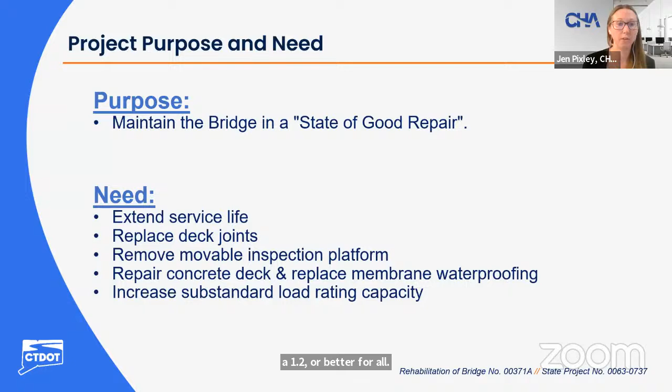The bridge was built in 1958 and had a full superstructure replacement in 1995. It carries 3 lanes eastbound and 4 lanes westbound. Spans 1 through 5 have an out-to-out dimension of approximately 92 feet, widening to approximately 112 feet at spans 6 through 11, as an 18-foot wide sidewalk frames into the main structure on the south side at Pier 4.

Here is a colored plan and elevation view of Founders Bridge. This view shows the west side on the Hartford side; the next will show the East Hartford side. The bridge is an 11-span structure comprised of a concrete deck supported by welded steel plate girders. Spans 1 and 2 are 2-span continuous, spans 3 through 5 are 3-span continuous, and spans 6 through 11 are 6-span continuous. The superstructure is supported by concrete abutments and piers.

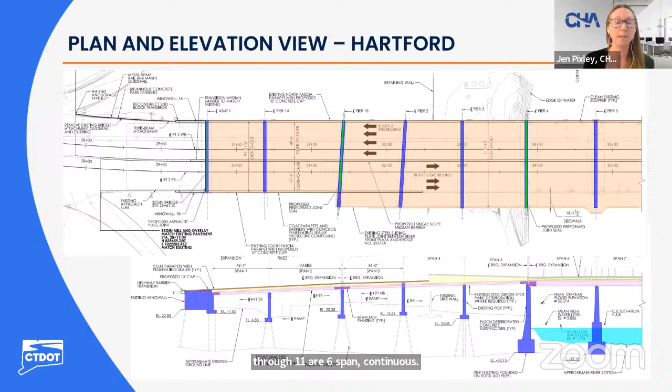As noted, this is the east side of the bridge on the East Hartford side.

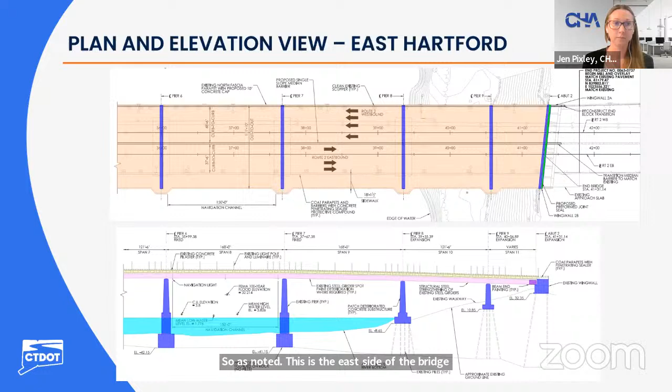This view shows the cross-section of the bridge. The top cross-section represents spans 1 through 5, and the bottom represents spans 6 through 11. Route 2 is a divided highway consisting of 4 11-foot travel lanes on the westbound side and 3 11-foot travel lanes on the eastbound side, with a 3.5-foot right shoulder and 1-foot left shoulders. Concrete parapets exist at both fascias and the medians. The median barrier separates Route 2 eastbound and westbound, and a sidewalk barrier separates the sidewalk and Route 2 eastbound.

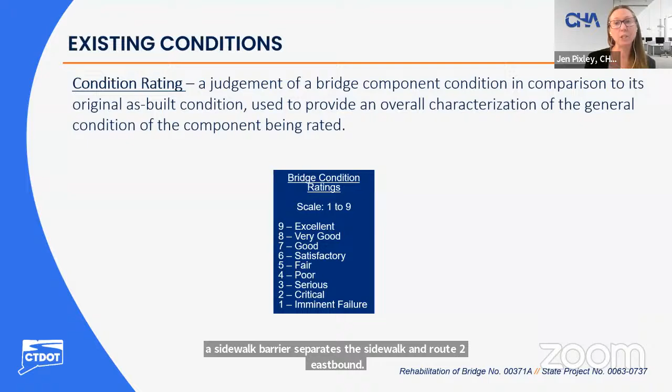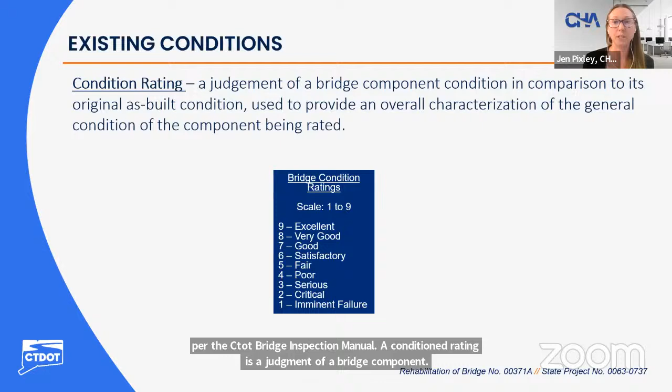Before getting into existing conditions, it's useful to note how condition ratings are determined and their purpose. Per the CTDOT Bridge Inspection Manual, a condition rating is a judgment of a bridge component's condition compared to its original as-built condition, used to characterize the general condition of the component being rated. Condition ratings are assigned a numerical value: 8 being very good, 7 good, 6 satisfactory, 5 fair, and 4 poor.

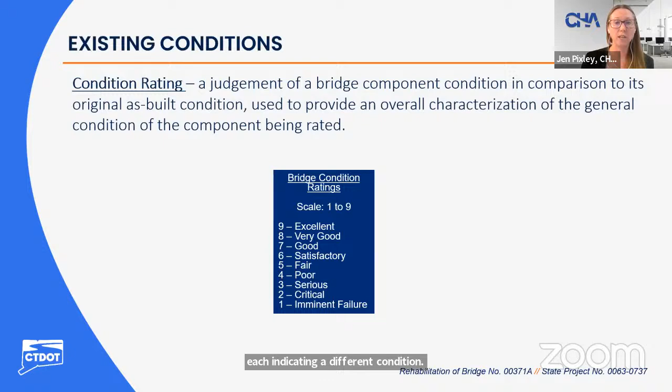Now discussing existing conditions of Founders Bridge. First, the deck: overall it is in satisfactory condition. The underside exhibits shallow rebar, map cracking, and hairline cracks with efflorescence and rust staining, some with dampness and seepage. There is isolated honeycombing with exposed rebar up to 1/2 inch deep, numerous hollow areas, numerous spalls up to 2.5 inches deep, and isolated spalls up to 4 inches deep, several with exposed rebar. The true condition of the deck is unknown due to the bituminous concrete wearing surface on top.

Existing deck joints are in fair condition. There are asphaltic plug joints at Abutment 1 and Pier 1B, installed in 2012. There are modular deck joints with concrete headers at Pier 4 and Abutment 2, original to the deck and installed in 1995. The asphaltic plug joints were recently repaired.

Modular deck joints exhibit separations up to 15 feet long between glands and steel extrusions, with light visible below, moderate sand impaction in the joint glands, as well as ponding water. Concrete headers exhibit random spalling up to 1 inch deep, as well as other spalls up to 2 inches deep. The pourable seal joint at Abutment 2 is missing up to 50% of the joint length. The sidewalk sliding plate deck joints with concrete headers, located at Pier 4 and Abutment 2, exhibit isolated spalls up to 3/4 inch deep in the concrete header.

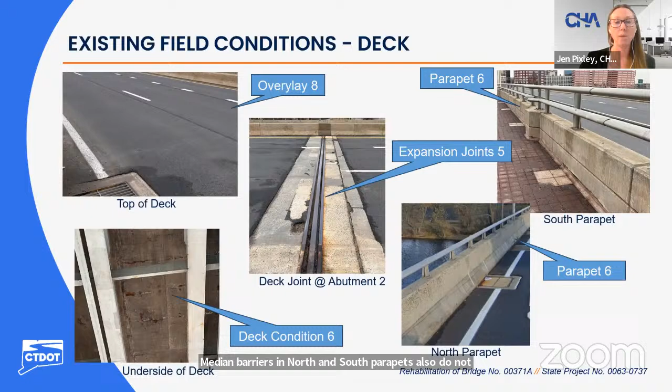The concrete parapets are in satisfactory condition and the medians are in good condition. The north fascia parapet and sidewalk barrier meet TL4 loading but are not MASH compliant. The median barrier is also not MASH compliant and only meets TL2 loading. Median barriers and north and south fascia parapets also do not meet CTDOT's minimum height requirement of 42 inches above the roadway surface.

Regarding existing conditions at the approaches, overall they are in satisfactory condition. The approach slabs are not visible as the approach pavement is in very good condition, having been recently paved. The approach guide rail at the northwest approach is in satisfactory condition with some collision damage, and appears to meet R-B standards. However, the guide rail and bridge attachments do not meet current CTDOT standards and are not MASH compliant.

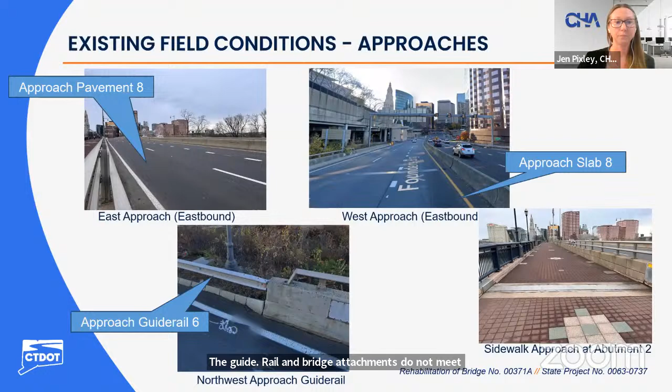Existing conditions for the superstructure. Overall, the superstructure is in satisfactory condition. The bearings are noted to be in fair condition.

The bearings consist of elastomeric expansion bearings, steel fixed bearings, and pot bearings. The elastomeric bearings exhibit isolated minor curling and bulging, random gaps up to 1/4 inch between the pad and pedestal.

With up to 27% loss of bearing contact area, and laminated rust at sole plates. The fixed bearings exhibit random moderate to heavy rust, anchor bolts slightly tipped and nuts loose or backed off, gaps up to 1/4 inch between masonry plates and pedestals, which result in up to 71% loss of bearing contact area at one location, and all other locations with up to 20% loss of bearing contact area.

The pot bearings exhibit isolated sole plates in contact with keeper blocks, light to heavy rust, and up to 1/16 inch deep section loss due to leaking joints, isolated PTFE strips sliding out, and isolated Teflon shavings observed.

The girders are noted to be in satisfactory condition. The girders exhibit random peeling paint and up to heavy rust, isolated laminated rust, and isolated minor losses, which result in less than 5% flange loss and less than 10% bearing and shear loss.

Structural steel paint is noted to be in good condition, with less than 5% of the exposed steel surface area showing evidence of rusting and missing paint coating.

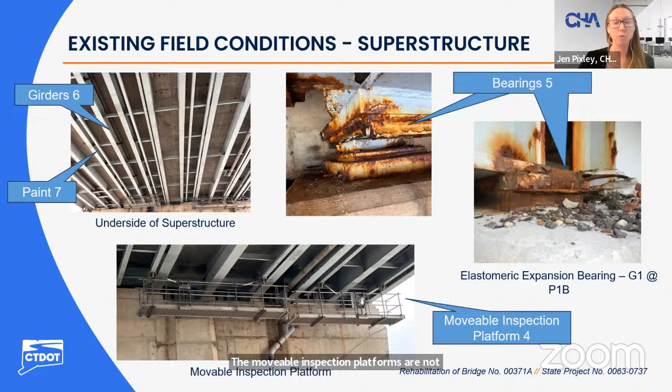The movable inspection platforms are not functioning and are in poor condition. These will be removed as part of this project.

For the substructure, overall, the substructure is in satisfactory condition. The concrete abutments exhibit vertical, horizontal, and map hairline cracks with efflorescence and rust, hollow areas and spalls up to 2 inch deep with and without exposed rebar.

Piers 1A, 1B, and 2 are concrete piers with pier caps and columns, and piers 3 through 9 are solid concrete wall piers with post tensioning.

The pier caps and columns exhibit linear and map hairline cracks with isolated efflorescence and spalls up to 1/2 inch deep. Wall piers also exhibit linear and map hairline cracks with random rust and efflorescence, as well as isolated hollow areas, isolated spalls with exposed rebar up to 4 inch deep.

Piers 4 through 8 stems extend below the water line and exhibit spalls with exposed rebar and some with section loss, abrasion throughout, hairline cracks, and some cracks open up to 1/8 inch wide.

For erosion and scour, is noted to be in satisfactory condition. There are 2 areas of erosion, one at abutment 2 and one at pier 2, which are both located below scupper pipes.

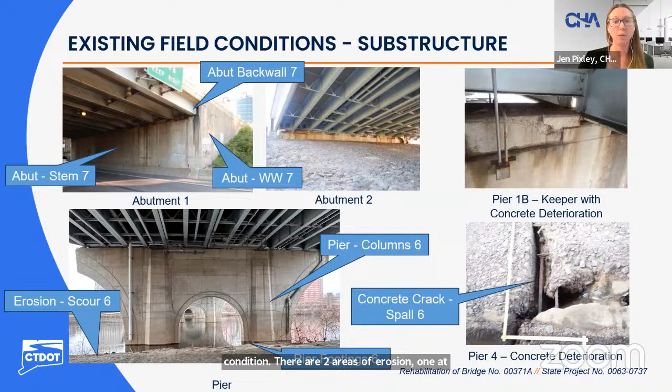Existing condition of the channel and protection. Overall, channel and channel protection is in satisfactory condition. Channel scour is in satisfactory condition as well.

The channel bottom elevation have areas of aggradation up to 4.7 inches high and areas of degradation up to 7.7 feet deep.

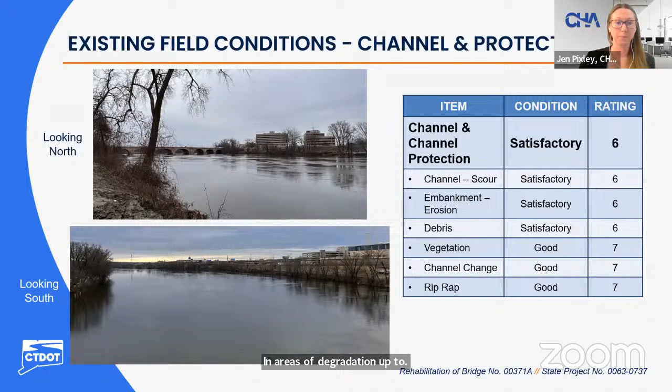Major scope of work items include steel strengthening, painting beam ends, replacing elastomeric and fixed bearings, as well as pot bearings at pier 4 and abutment 2, replace deck joints, replace wearing surface and membrane waterproofing, repair concrete deck, approach slabs and barriers.

Add a 10-inch concrete cap to the north fascia parapet and portion of the south fascia parapet, replace median barrier, repair concrete substructure, replace the northwest approach guide rail and curbing, upgrade end block transitions to be MASH compliant, restore erosion at abutment 2 and pier 2, install new roadway lighting poles, navigation light, and night underbridge lighting.

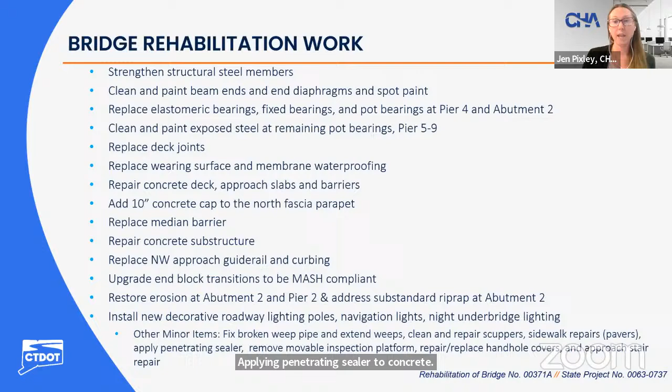Other minor items include repair broken weep pipe, extending weeps, cleaning and repairing scuppers, sidewalk paver repairs, applying penetrating sealer to concrete, removing the movable inspection platform, repairing handhole covers, and repairing approach stairs.

Next, I will discuss some additional information on the existing conditions and proposed repairs on a few scope items.

Steel strengthening will be performed to bring the structure up to current code standards. Strengthening includes adding diaphragms, installing bottom flange cover plates, and installing transverse stiffeners.

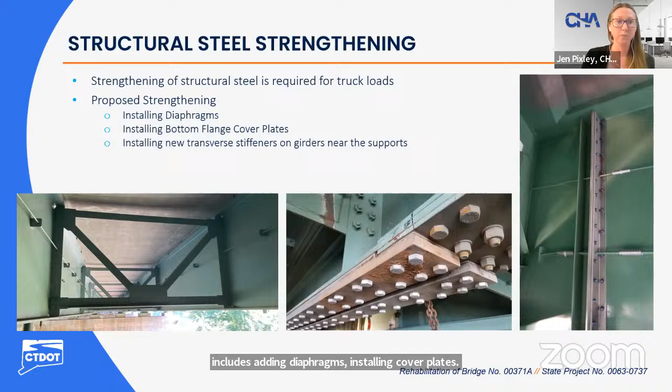For bridge joints, as noted previously, are in fair condition. There are asphaltic plug joints at abutment 1 and pier 1B. There are modular deck joints that are original to the deck and were installed in 1995 at pier 4 and abutment 2. All deck joints will be replaced.

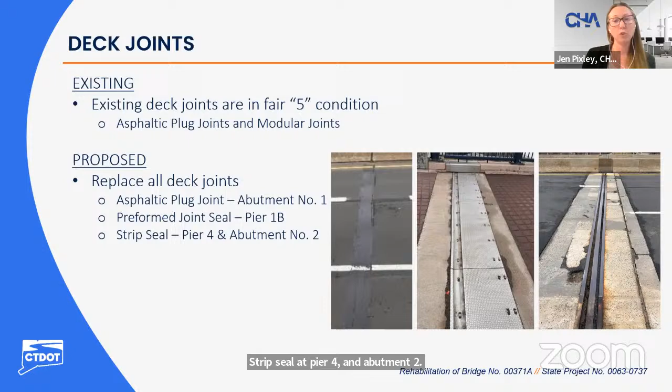Asphaltic plug joints at abutment 1, preformed joint seal at pier 1B, strip seal at pier 4 and abutment 2. It should be noted that preformed joint seal and strip seals require deck end reconstruction to install the new joints.

Quickly touching upon highway geometrics for this project, the bridge has an ADT of approximately 27,000, and the bridge will not improve any highway geometrics.

For anticipated project impacts, MPT on the bridge will utilize staged construction for repairing the concrete deck, installing the waterproofing membrane and pavement, replacing deck joints, replacing the median, and capping concrete parapets. This work will be accomplished using temporary lane closures and lane shifts.

It is anticipated a portion of the deck repairs and deck joint reconstruction may be accomplished using temporary off-peak lane and shoulder closures. For sidewalk repairs, the work area and pedestrian path will be separated by water-filled barrier, and the contractor will be required to maintain a minimum 5-foot pedestrian path throughout the entire construction duration.

Stage construction will be utilized. Stage 1 will close the left lane of Route 2 eastbound and westbound, while Stage 2 will close the right lanes of Route 2 eastbound and westbound. There are no anticipated impacts to the utilities.

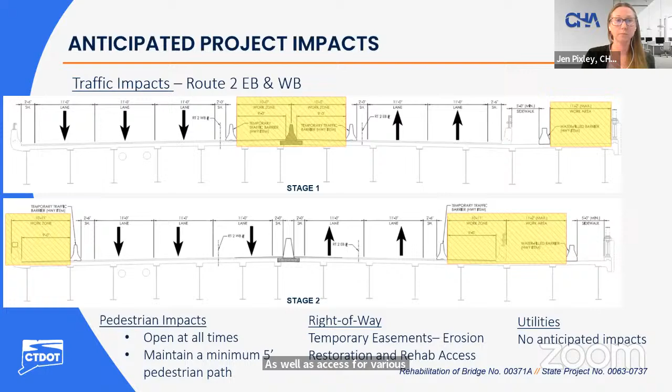Additional anticipated project impacts. For Founders Bridge, our bridge spans over roadways, railroad, and walkways. So in span 1, we have I-91 southbound, where we have beam end painting and bearing replacement, which may require temporary lane shifts or closures.

And span 2 at Grove Street to I-84 westbound on-ramp, steel strengthening and bearing replacement may require a ramp closure, with a detour utilizing Sheldon Street on-ramp.

We also have I-91 northbound to I-84 westbound on-ramp, where you have beam end painting, bearing replacement, and steel strengthening, which may require temporary lane shifts or closures.

For span 3, over I-91 northbound, beam end painting and bearing replacement may require temporary lane shifts or closures. And Grove Street to I-91 northbound on-ramp, bearing replacement may require ramp closure with a detour utilizing Sheldon Street on-ramp.

In span 4, the Connecticut Southern Railroad is located adjacent to Pier 2, where bearings are to be replaced. It is anticipated that these bearings will be replaced from the span 3 side of Pier 2.

Below span 5, we have the Hartford River Walk, which extends below spans 4 and 5. There will be substructure repairs at Pier 4 and bearing replacements at Piers 3 and 4.

And lastly, in span 10, the Great River Park Trail extends below span 10. There will be substructure repairs and bearing painting at Pier 8.

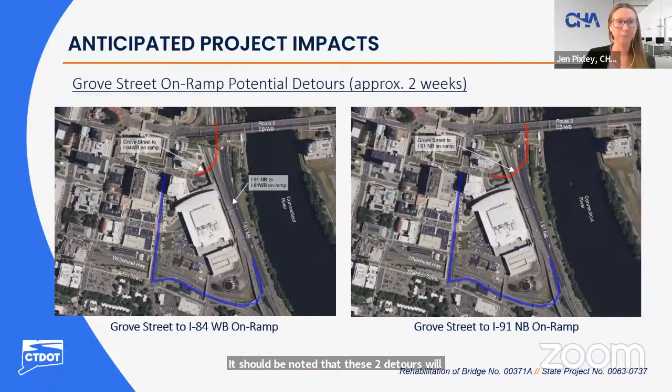In addition to the previous slide detours, the following detours are for traffic entering Grove Street from the Science Center or the Convention Center. Traffic here cannot turn left onto Columbus Boulevard, so this detour will direct traffic north on Columbus Boulevard to State Street, up Market Street to Kinsley Street, and back down Columbus Boulevard, utilizing the Sheldon Street on-ramp.

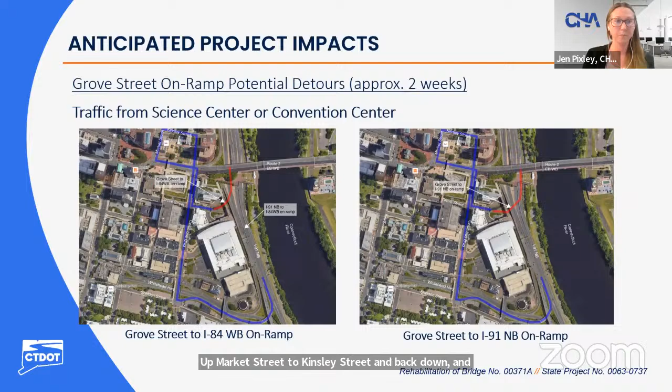This slide highlights the existing dike wall and river walk trail in Hartford and the existing levee and Great River Park Trail in East Hartford. The river walk and Great River Park Trail will remain open at all times.

The contractor may temporarily require access through these trails to obtain access to the underside of the bridge. There will be no impacts to the dike wall in Hartford, and the levee in East Hartford requires temporary access to gain access to Abutment 2.

Also, repair of riprap at this location may be included in this project. Coordination on this is still ongoing.

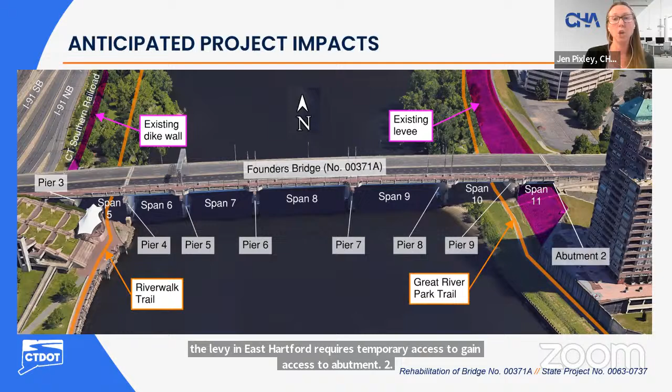Potential laydown locations. We are evaluating two potential locations, both at the east approach. The first is located just adjacent to the existing ramp to Pitkin Street, and the second is located adjacent to the on and off ramp at Darlin Street.

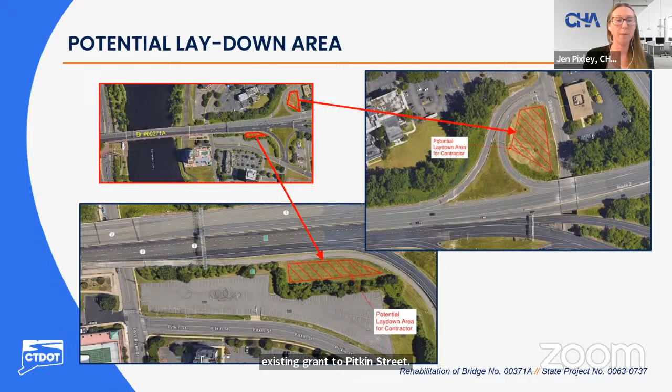So this concludes the technical presentation. Luke will now discuss schedule and cost.

Thank you, Jen. For the schedule, we have design approval coming up on October 9th of this year, 2024. Our final design plan submission is due April 22nd of 2026. Design completion date is June 3rd, 2026.

We will advertise this project for construction July 11th, 2026. We anticipate construction to begin in the late summer, early fall of 2026. We expect construction to take 2 seasons.

Right now, the total estimated construction cost is $22.3 million, funded 80% by federal funds, 20% by state funds, and no town funds required. I would like to point out that right now, the cost and schedule are preliminary and they are subject to change.

All right, to summarize tonight's meeting, I'd like to restate some important information. This is a bridge rehabilitation project, which will extend the useful life of the structure as well as increase the structural capacity. Route 2 eastbound and westbound traffic will be impacted with staged construction.

Stage 1 is mainly for the median replacement as well as deck repairs and joint replacement. Stage 2 is for the outside barrier work along with deck and joint work.

Short-term detours will be required for the Grove Street on-ramps to I-84 westbound and I-91 northbound. Lane shifts on roadways below the bridge will be required for I-91 northbound and southbound. And lastly, pedestrian impacts will include reduced pedestrian walkway widths, but a minimum width of 5 foot will be maintained.

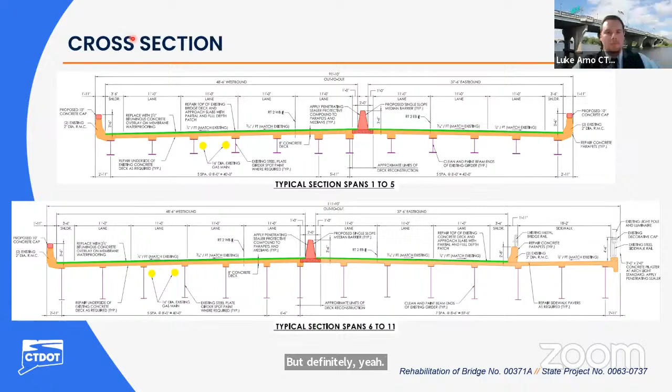Do you anticipate the work over the river being done? There was mention of it possibly being done by barge. Where do you see the barges being serviced from, or where do you think they're going to do their loading and unloading of materials and equipment?

So the barge, we're permitting it to allow the contractor the potential to use it. We've done similar projects to this one, right up the river at Dexter Coffin. We permitted for a barge there too, but they didn't actually use it. We just want to anticipate the worst case scenario so they don't run into any permitting issues. I don't know that we've identified specific locations at this point, but as we progress we can get that information.

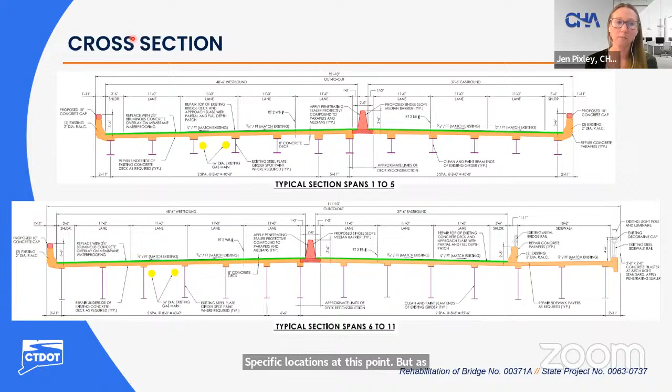If there are going to be barges and they need a facility to get access on and off, it would be great to do it from Charter Oak Landing, which is the bridge to the south of the Founders. Typically we'll do it from an established boat launch. We won't be cutting in, especially with the levee system over in that area. The Charter Oak is better suited for that than any of the other boat launches on the river in East Hartford. That's excellent info, because as we start permitting, they will definitely ask us which one.

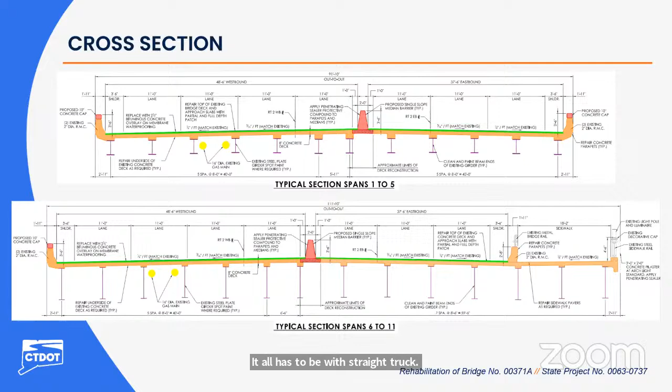Also know that you cannot take a tractor trailer in from the Hartford side to the bridge. It all has to be with a straight truck. You can't physically turn a tractor trailer underneath the I-91 southbound viaduct.

For the detour, you mean? No, for construction access. Can you restate that? Where is it not available? So there's an existing paved access road that comes in from Van Dyke Ave by the Colt building. It's something that Riverfront Recapture maintains. It's on a combination of state, private, and City of Hartford property. And it has a 90-degree turn in it that you can't drive a regular tractor trailer through.

It can't make the turn. Gotcha. If you're bringing in a crane, it has to be either a small crane or a crane with all-wheel steer. You can bring a straight bed truck in, but you cannot take a tractor trailer in there. Right, that's great, thank you.

The inspection platforms, having installed them many years ago, are actually still operable. You just have to adjust the tension on the wheels to get them to move, and you need like a superhuman person in there to turn the handle to get them to move. Just, I don't know if you guys are aware of that or not.

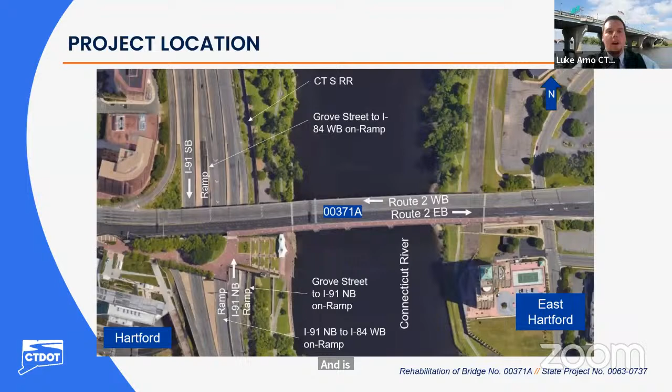And is this truly a 2 construction season? I think it's based on timing as well. We're starting late summer, so we'll start construction, have the off season, and come back in and finish the following year.

I think most of the work you guys are proposing would have minimum impact on our park operations and the events and activities that we do. But anything we could do to at minimum coordinate our events calendar with the construction work, I think is important. If there's any way we could work collectively to come up with a good schedule, say in May, as we look ahead to the coming year, as to when is a good time for a contractor to be working and when is not.

Most of our events and activities happen on evenings and weekends, so I don't anticipate many conflicts. But we do utilize areas that would be prime access areas for contractors for different events.

Understood. Yeah, we can definitely coordinate with you. Yeah, Mark, that's definitely a good comment. So we will coordinate further about that, and we'll include language in the contract to limit contractor activity during those times.

But are those activities or events on the bridge itself, or just in the area? So as an example, this past Saturday we had Taste of the Caribbean, a great community event, and there were tents set up underneath the bridge, vendor booths and tables for people to sit and eat. A lot of that equipment we set up typically on the Friday before the event, which would happen on a Saturday or Sunday.

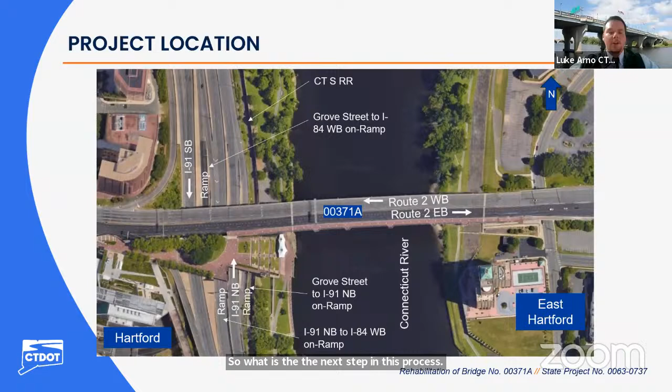We're wrapping up preliminary design. After that is design approval, then we'll move into final design. We'll try to lock in the design and further vet some of this coordination and other activities. And I'd say that's mostly it before we submit the plans and move to construction.

It'd be great to keep Riverfront Recapture in the loop on what's going on, so that way we're more than happy to share the real-time knowledge we have of what's going on with the bridge. I think we could be beneficial to the project process, and at the same time, the more we communicate, the better end product we'll have for everybody as far as coordination and speed of construction, with the least amount of conflicts possible.

I totally agree. Mark, you've been a wealth of knowledge tonight - it's almost like you're part of the team already. So I think we'll definitely keep you in the loop going forward. Okay, great. Thanks, Mark, for all the info. We'll definitely keep you in the loop.

Since you're here, are there any good activities going on the next few weekends? We were supposed to have a Jimmy Buffett tribute concert tomorrow night at the Plaza, but that's been canceled thanks to Tropical Storm Debby. But next Saturday is our Dragon Boat and Asian Festival, which will bring 15,000 people down to the downtown area for Dragon Boat racing on the river. We've got another concert on the 23rd, an Eagles tribute band, and then we have a regatta in October, and the Hartford Marathon comes through in October. There's something else in September I can't remember off the top of my head, but there's always stuff going on.